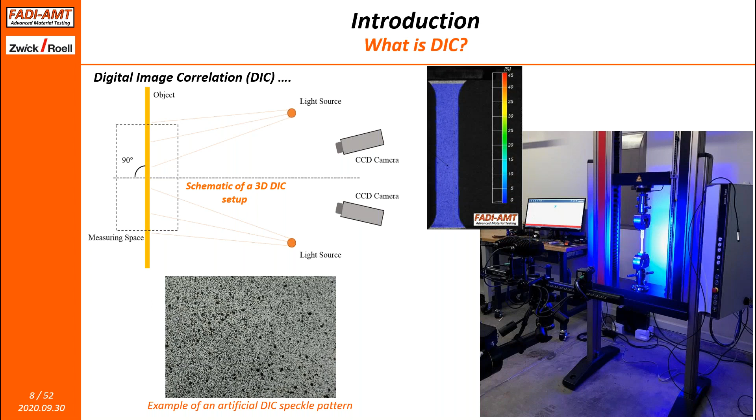That particular video you see here is a typical example of any DIC test. We see a colorful strain map overlaid over the entire sample as it's deforming. This colorful map represents the amount of strain or the intensity of strain, just like a typical finite element simulation, up until the moment of fracture.

Now that we've defined DIC, where do we see it, and what is its importance? What is the critical need for DIC? In essence, we see DIC in many tests, but the vast majority of it is still the simple and humble tension test, just like the test you see on the screen right now.

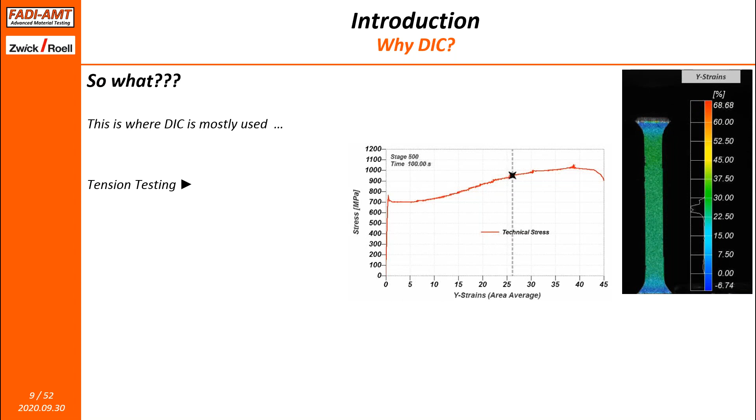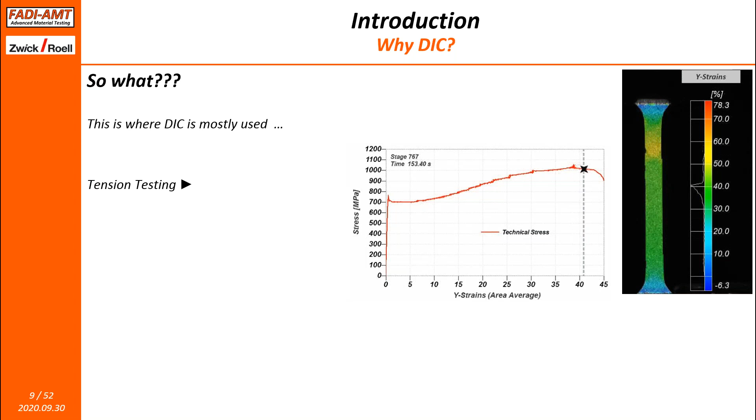In tension testing, when we use DIC, we get one of those videos I showed earlier, and we can construct a stress strain curve that looks like the one building up right now on the screen, and ultimately we characterize the deformation of the material.

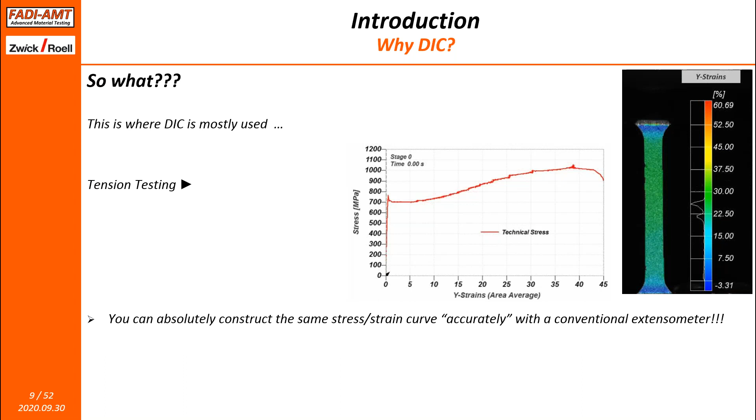The critical point here is that we can construct the same stress strain curve without DIC. You can do the same thing with the same level of accuracy with a conventional extensometer. We have to remind everyone that digital image correlation is nothing but a strain or deformation measurement technique. That means your stresses, which come from forces, have nothing to do with DIC. On a stress strain curve, the vertical axis is generated by a load cell, and the x-axis is generated by an extensometer, or in this case, DIC. So DIC only affects the x-axis of your measurement, not the vertical axis.

So in a case like this, if we can generate the same exact thing with an extensometer, why do we need DIC in the first place?

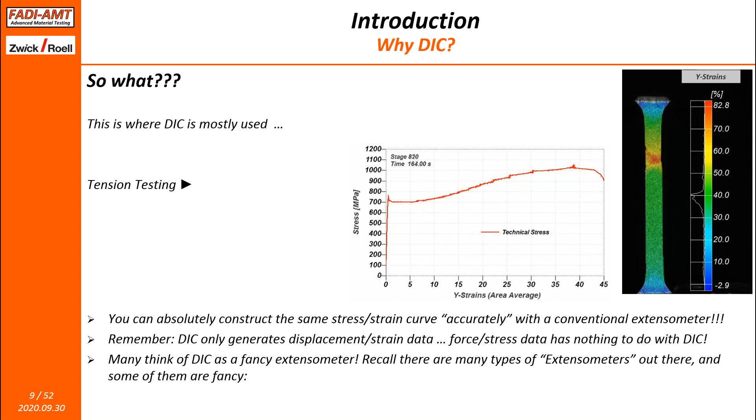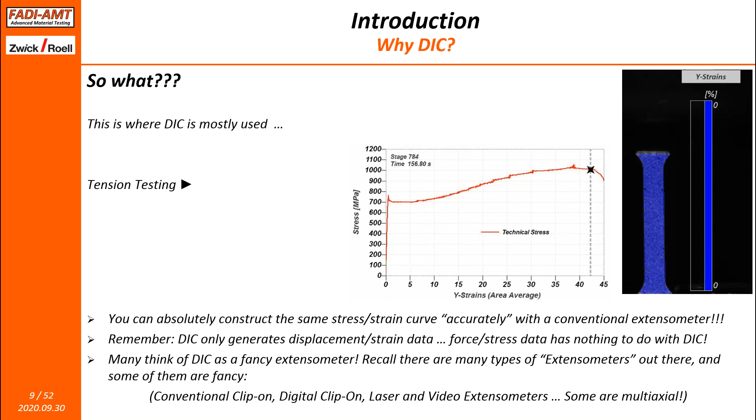Before I explain why, sometimes people think of DIC as just a fancy extensometer—the latest technology in strain measurement—and that it's good to have just because it's the latest. That's technically not correct, because there are multiple types of extensometers that work in different fashions with different technologies. Some are mechanical clip-on extensometers, some are more advanced digital, and we still have laser and video extensometers, with the latest generations labeled as optical extensometers. So we have a wide variety of contact and non-contact extensometers, some multi-axial offering multiple capabilities. That's where we need to be careful about how we compare DIC to these extensometers.

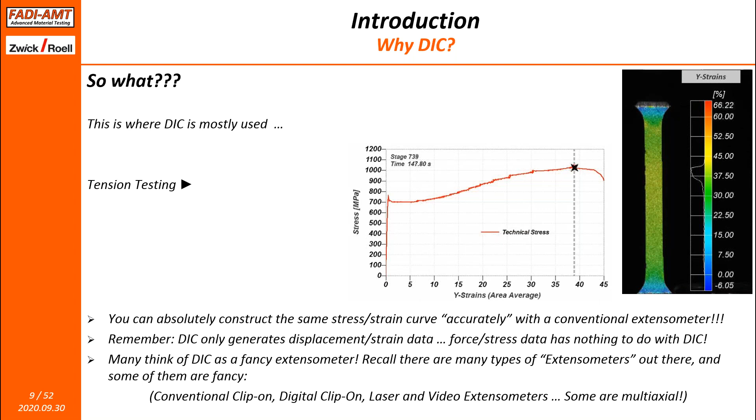When is DIC better, and when is it just as good as those? When do you have to consider DIC, and when are the cases where you can technically achieve the same objective without it? That's what we are going to try to cover today.

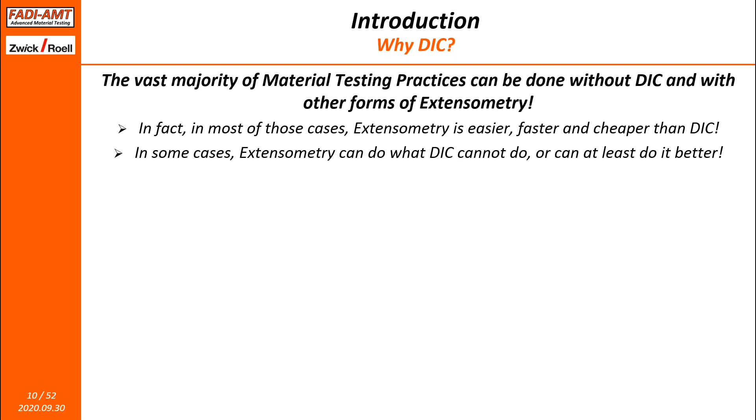We will start with a simple fact: the majority of material testing practices that happen every day in all these labs, whether academic or industrial, can be done without DIC, period, using other forms of extensometry. In many cases, extensometry is easier, faster, and cheaper, and can do what DIC cannot do. That means DIC is sometimes not the best solution, and some extensometers can do a better job.

So what is this webinar about then? We are still going to give all aspects, positive or negative, of both technologies, but today we will focus on particular application cases where you certainly need DIC, and where it provides value—in some cases very important and critical value—that cannot be matched by extensometers. We want to distinguish between them so you can make the right choice of technology for your application.

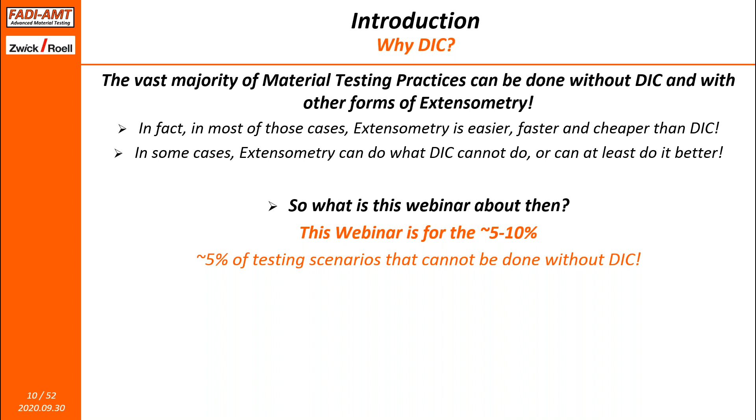For this webinar, I say we have about 5 to 10% of testing cases where DIC has a position. I break it like this: about 5% of testing scenarios simply cannot be done without DIC, and hopefully today we'll show examples of cases where it's really difficult, if not impossible, to get the same type of data without using DIC.

The other 5% can be done by both technologies, digital image correlation and other extensometers; however, using DIC still gives you an advantage. Overall, the way I picture it in my daily testing life is that we have a spectrum of testing applications, and in about 5 to 10% of cases, DIC is invaluable.

For the rest, can you use DIC? Absolutely. Can you use it for the entire spectrum? I believe not. So there is a certain position where it's really critical, and we want to focus on that—the 10% I want to cover today.

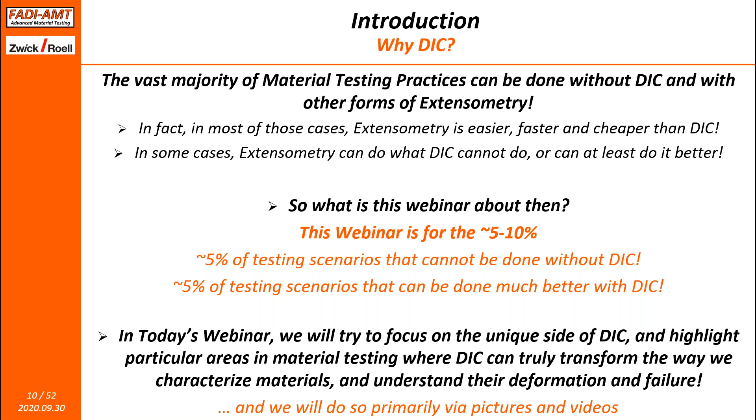Today's webinar will talk about the uniqueness of DIC and highlight the particular areas in material testing where you can use it to transform how you characterize materials and understand their deformation and failure. To do this effectively, we will minimize text and focus on examples from real-life testing scenarios that highlight the value of DIC, and also show comparisons with conventional extensometry.

To keep things in perspective, since we've done several webinars like this before and tend to spread wide across many types of tests, today we will stay focused and cover only two: tension testing and biaxial testing. The tension test is the most popular test out there, and we want to show that even for this simple, not very sophisticated test, you will find certain areas where DIC brings a lot of value.

And we think, with the diverse audience that we have today, that we can connect with most of you, because at least everyone who's done material testing has been exposed to some form of tension testing. And so there should be a nice relationship to the things you are doing in your lab right now. The biaxial testing is just slightly more complicated than the tension test. Maybe it's not as popular, but it provides another platform for comparison. So it's a step up from tension testing.

And here we show examples again of the uniqueness before we go, hopefully in future webinars, to other complex cases like shear, bending, compression, and also a dedicated webinar on component testing, where we have a totally different perspective on how we can use these technologies to help us in component testing.

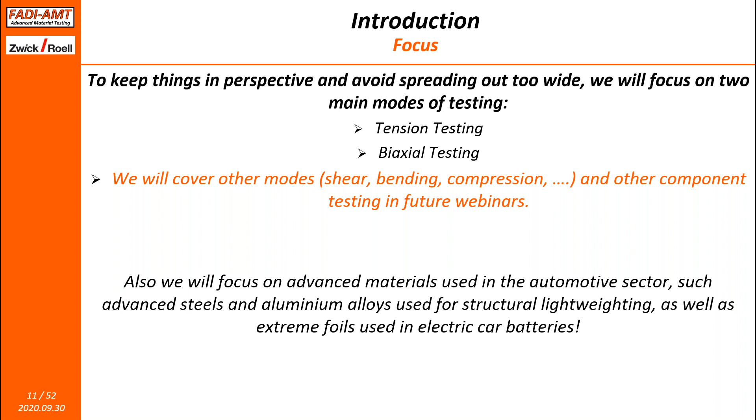And to stay true to the title of the presentation, we will focus our examples on the use of advanced materials in the automotive sector. This is an important sector, and we see a lot of use of materials that really didn't exist 5, 10, 15 years ago. So there's lots of materials that are new to the sector, or improved to the level that requires a change in the material testing system or approach. This includes advanced high-strength steels and aluminum alloys for lightweighting, as well as some foils used in car batteries. So let's start with tension testing.

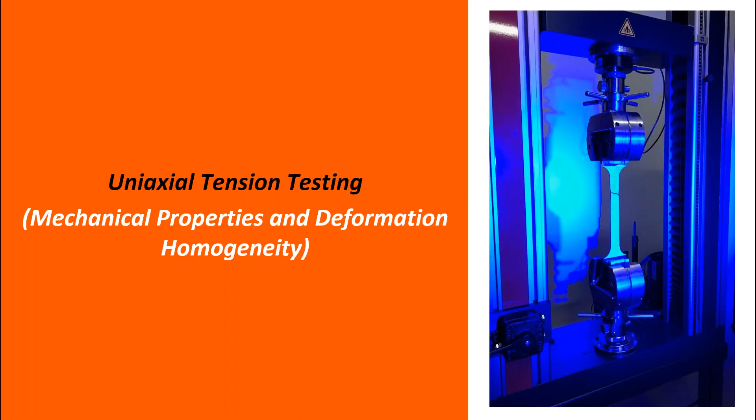Typically tension testing is done for the purpose of obtaining the mechanical properties of the material and also evaluating the deformation homogeneity of it. On the right-hand side is a typical tension setup, tension machine with a test sample up to failure. So a standard tension test per any standard, especially ISO 6892, one of the most popular, or equivalent ones from ASTM, JIS, or DIN, are the most commonly performed types of tests out there.

Naturally, in these tests, we use conventional extensometry. In fact, most of these standards are written using conventional extensometry, in particular clip-on extensometers or contact extensometers. And they are actually adequate. Of course, if they were not adequate, they would not be covered by the standard, but usually the standards describe exactly how you could use these conventional extensometry techniques to get your measurements correctly, accurately, and reliably.

In terms of the standard itself, one aspect of the standard is basically the sample geometry. And I wanted to highlight this particular aspect of the test to drive how we can go from conventional extensometry to special extensometry and, of course, DIC - and that is the sample geometry.

So if we are to talk about typical testing, we should always adhere to the standard sample size dictated by ASTM or ISO. However, there are so many cases where we have, and sometimes must, deviate from these standards. And here, in this slide, I've listed a few cases where we have to go smaller, and a few cases where we have to go larger.

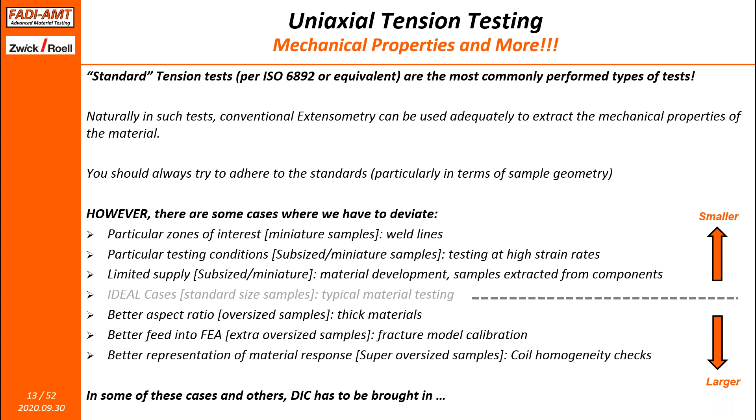We will show how in many of these cases that are listed here, and some others, DIC has to be brought in simply because of the limitations with existing extensometry.

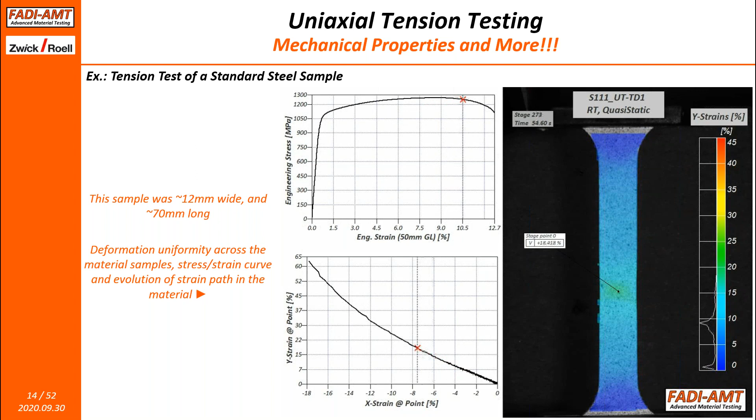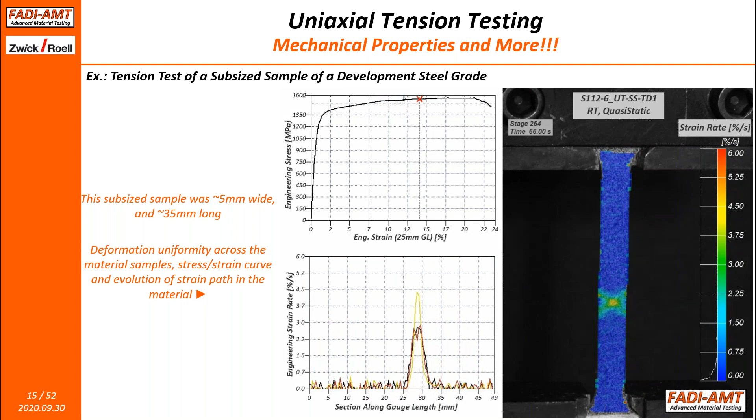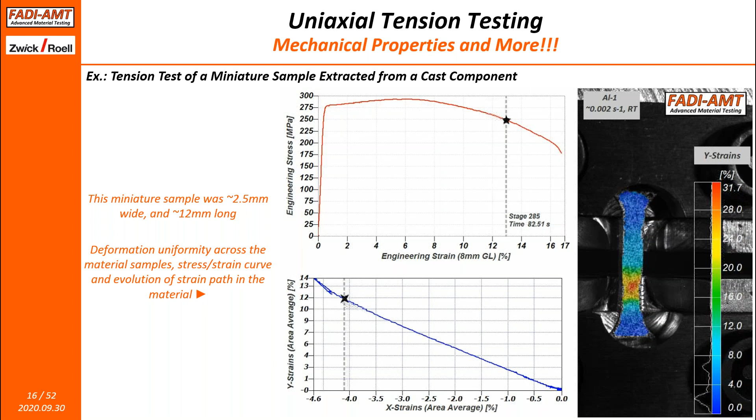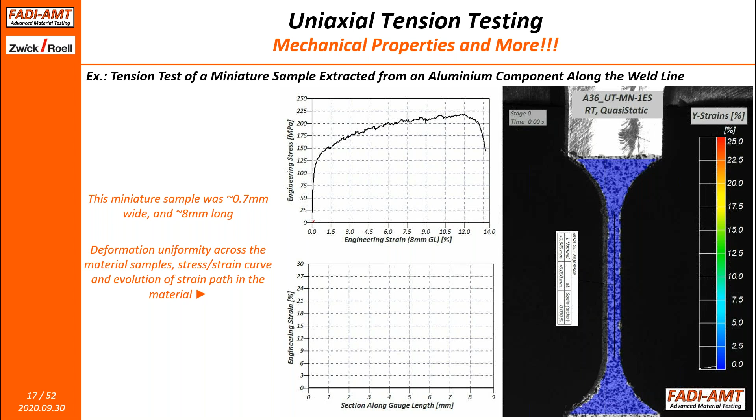Now we go to another extreme - an example of extremity in sample size where we have to go to a miniature sample. This is a weld line. A sample was extracted along the weld line of a laser welded aluminum component, about 0.7 millimeters wide and about 8 millimeters long. Could you use conventional or non-contact extensometry here? Potentially yes, but very difficult. That's where DIC offers a significant advantage in identifying the true behavior of the weld material and how it deforms. Just a note - this stress strain curve is coarse not because of a load measurement issue, it's simply because the material is a 5000 series aluminum, which will band under tensile loading.

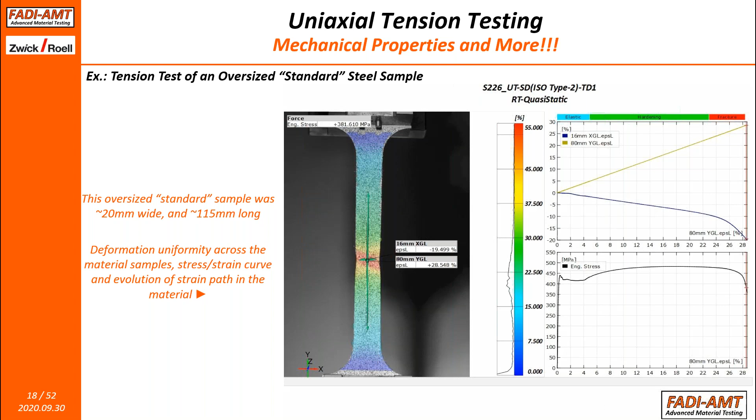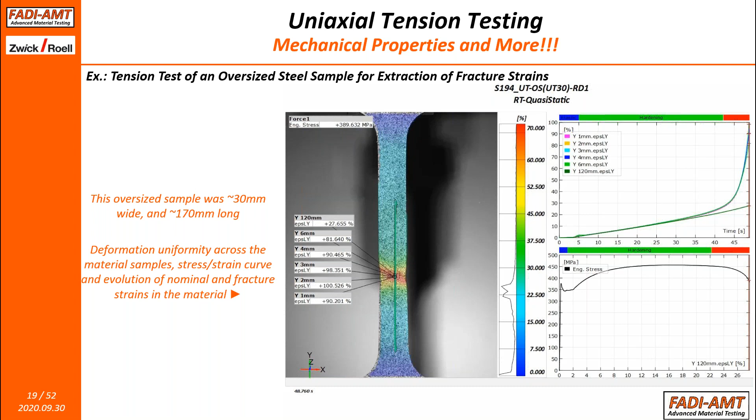And in some cases, you have to go even wider and longer because many cases require larger mesh sizes for finite element analysis.

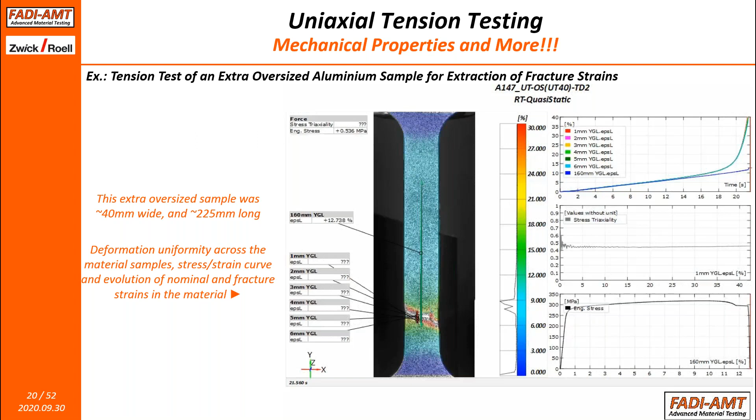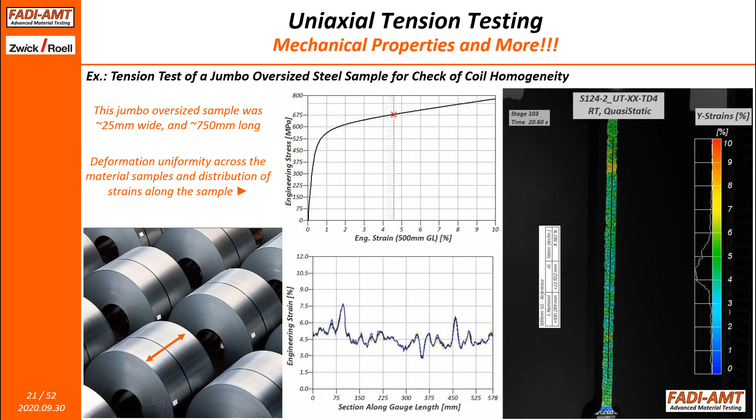So up to here, we've talked about seemingly standard or conventional tension tests, and we've highlighted many cases where typical extensometry cannot be used. Now we go to another set of tension tests, but they're technically more complex in nature, that will also invite applications for the DIC to complement or replace conventional extensometry.

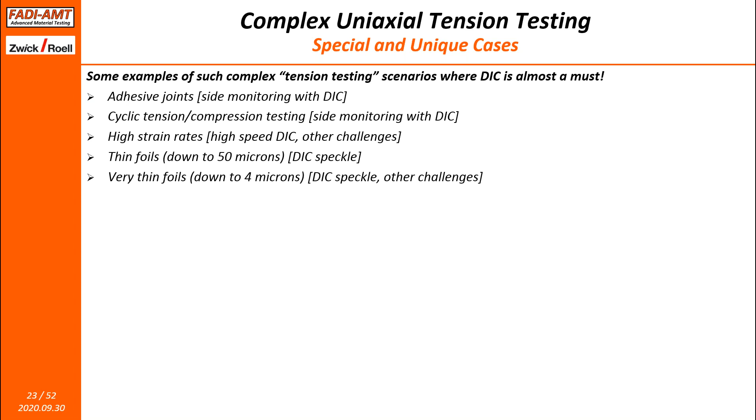And so I have picked here a couple of cases. Adhesive joints, or testing of adhesive joints. This is a standard test in essence, but we will show how the DIC can improve it. Cyclic tension compression testing - this is a very custom test for spring back prediction, and we show how the need for side monitoring with the DIC brings significant value. Then we will just provide a very quick snapshot of high rate testing, or testing at very high strain rates. Again, this is a very special area where the nature of the test, the high speed and other challenges makes it really difficult to do this kind of testing without the DIC. And finally, I'm going to just touch on a couple of examples of foil testing, foils that are thin or extremely thin, and how DIC can allow you to obtain the strains in a correct manner so that you can construct a meaningful stress strain curve.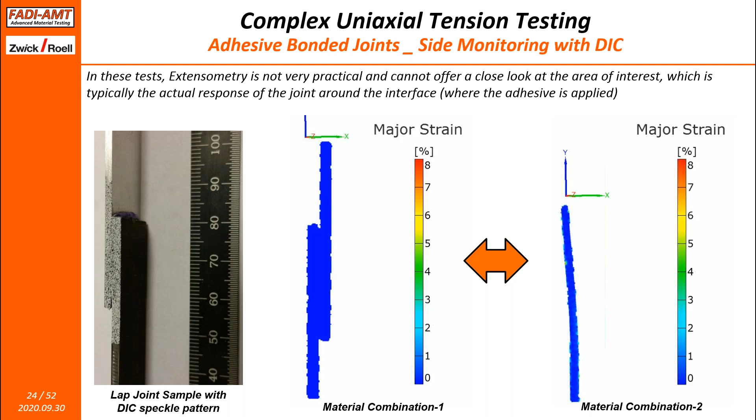And therefore you see totally different failure. Again, on the right-hand side, there is a peeling effect that starts from the top to the bottom. On the left, it's a sudden failure of the actual adhesive layer. And again, that's something that is impossible to do with conventional extensometry.

Another case of complex testing still within the tension domain. This is a tension compression cyclic test specifically designed for spring back prediction in the automotive sector. It uses a tension machine just like any other, but we have to couple it with a special fixture to prevent the material from buckling, which we call an anti-buckling device.

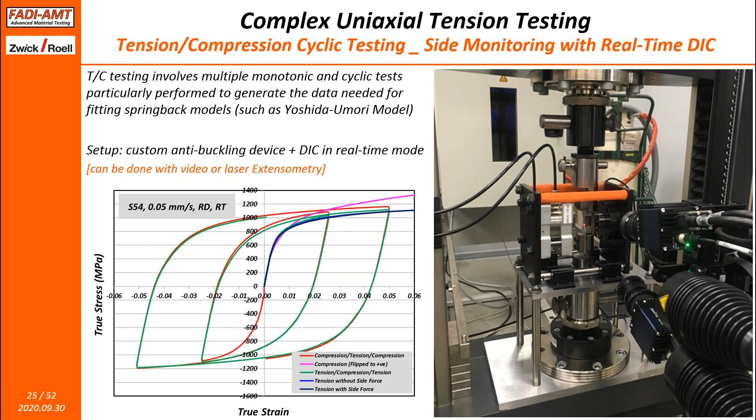Those strains are extremely important to measure, and not just measure them, we need to measure them in situ during the test so that we can design and execute the tension and compression cycles you see on the left. We should be able to monitor the strains during the test and reverse the machine when we hit a particular value. That's basically what can be done with DIC, and again, it's difficult, if not semi-impossible, with conventional extensometry.

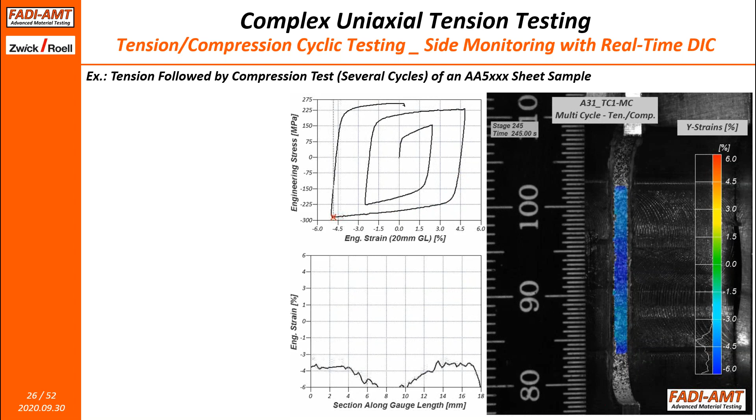The critical area of high strain rate testing, or testing at high speeds and high strain rates. It's a simple fact: if you want to simulate events like crash or impact, then you need data. That data is simply tension testing data at different speeds. The typical scenario is that we have so many issues associated with this type of test.

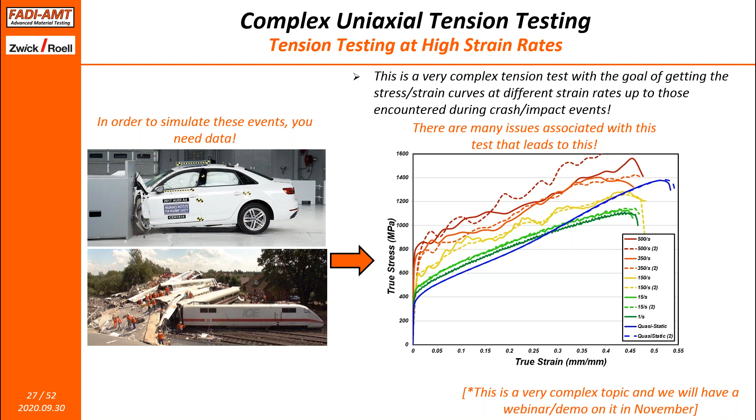This is a very critical area where DIC brings a lot of value. Now, this is again a very complex area, and we have another webinar/demo in November about this particular topic. But for today, I just selected a couple of slides to highlight the issues and how DIC can be used here, or why it's used versus conventional extensometry to produce better data.

With DIC, we can resolve some of the issues encountered in high-speed testing. One is that when you go faster, you have a shorter amount of time to measure or collect data. When talking about 100 to 1,000 strains per second, you have about 1 millisecond, sometimes less, sometimes more, at those speeds. Even though we have data acquisition systems that can capture load data at that rate, there isn't an easy way to capture displacement or strain at that kind of rate or frequency. And of course, the second problem is you can't use any form of contact extensometry here.

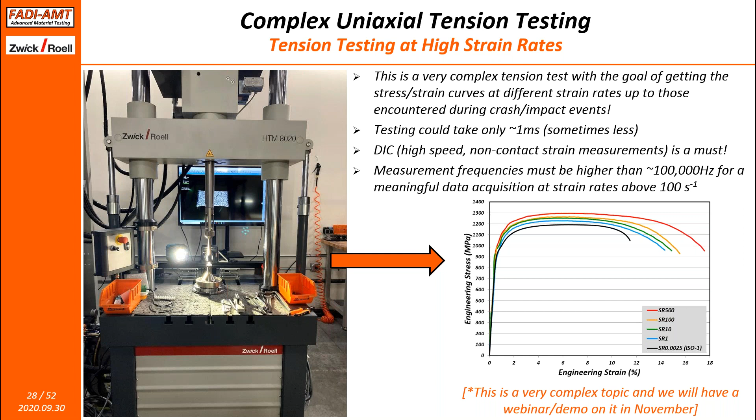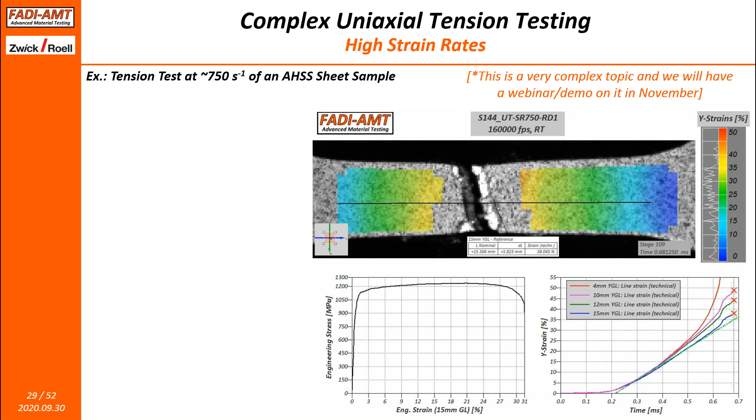Just using high-speed imagery and then using the same principles of correlation, we can obtain strain data, and we couple the strain data with the force data or stress data. Now we have a stress-strain curve, as the one you see here on the screen, for about 750 strains per second.

Final case for tension is foils. This is a new area. I mean, it's not actually a new testing area, but there's new emphasis on it because we see a lot of foils around us, and there are many materials being investigated for different applications, so now we have to deal with foils.

In principle, there's nothing really different between testing a foil and a sheet. It's the same machine, the same grips to some extent, and so on. The only difference is that the sample is really tiny or thin, and in some cases extremely thin.

Regardless, once we enter the foil domain, when you drop below 500 microns, like half a millimeter, it's really difficult to use any clip-on extensometer because you'll damage the sample before you start the test. So that's out. You have two options: use DIC or any other non-contact extensometer technology, like laser or video.

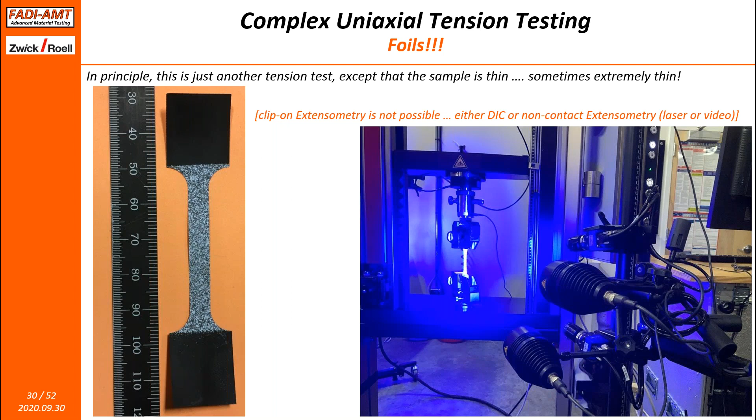So that sounds okay. In many cases, yes, video or laser extensometers can work. I'm going to give you a couple of examples where either technology would work.

If you have thin foils but the strength of the foil is very strong, then it's technically not a significant problem. You can use laser extensometers and video extensometers. So long as you can provide those marks on the sample for the system to track, you should be absolutely fine. It's not necessarily a big problem with thin foils if the strength is high, because your likelihood of damaging the sample is lower.

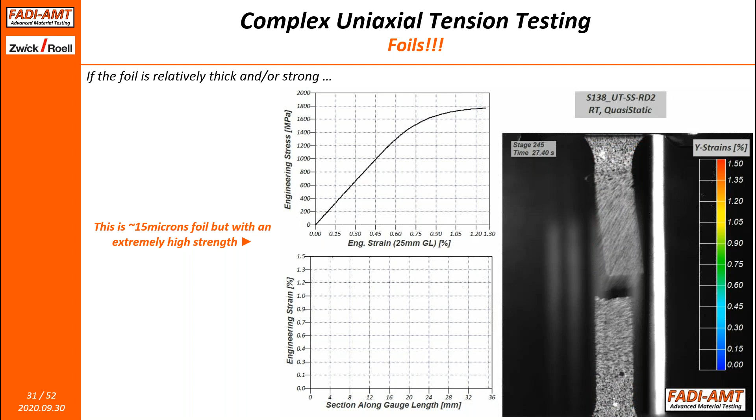The same thing applies if your foil is generous in terms of thickness. We always say internally, if it's above 50 microns, it's tolerable. You can put a couple of marks, use laser extensometer markers, or paint it for DIC. But in both cases, you must be very careful because you could potentially affect the sample you're trying to test, and if things aren't done properly, it will lead to premature failure in the sample.

And again, I want to show this video, and that's what we typically look for. Regardless of the strength and thickness of the material, we look for nice deformation without any significant hot spots, and ultimately, ideally, we would want to see failure in the middle of the sample.

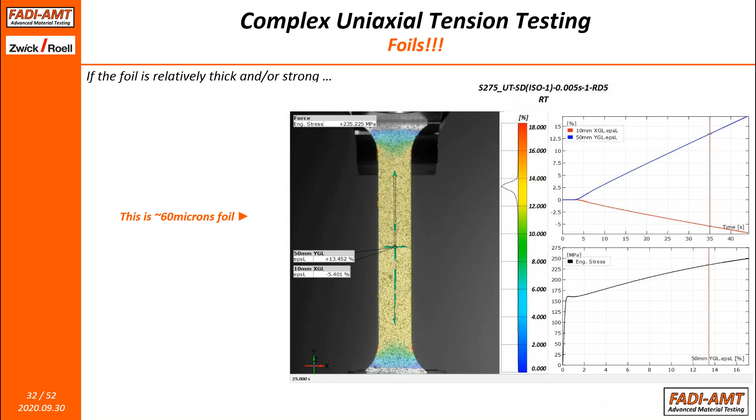In these particular two cases, this is where conventional laser/video extensometry could offer an advantage over DIC. If you can track the material deformation without having to paint it, that is actually better than using DIC, because DIC adds a layer of paint or two, which could affect the properties of the material and also the sample itself when you handle it.

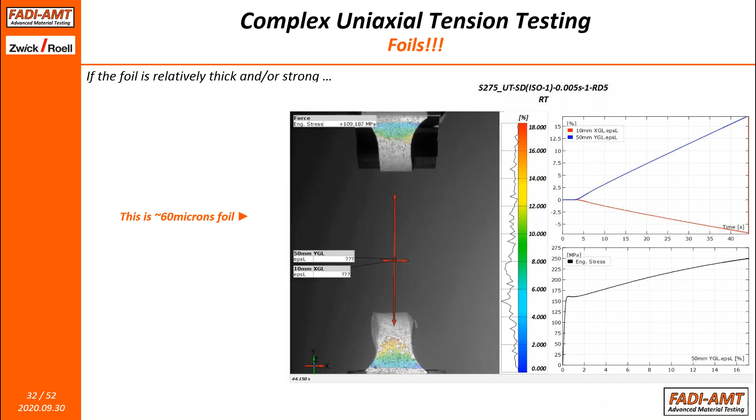But then we go to some extreme cases. When we go to high speeds, if you're doing high speed with foils, we're back to the same scenario as sheet metals before: it's really difficult to use conventional extensometry, so DIC has to be used in the same fashion, at intermediate or high speed mode, just like we've done before. This is just an example of it.

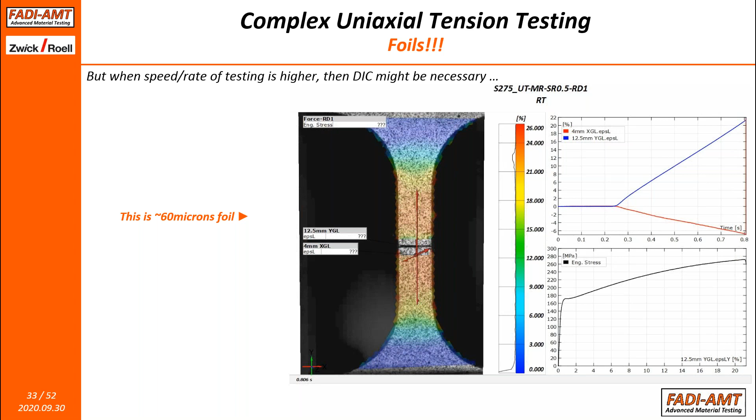Then we go to the extreme of the extreme. When the thickness of the foil drops below 10 microns, it's really, really difficult to use anything, because now the problem is not really the type of technology. The difficulty is how you could use any type of extensometer, whether video, laser, or DIC, without damaging the sample while marking it.

So here we say all technologies are comparable; it only depends on your preparation of the sample. This is a 4 micron sample. Ultimately, it was done with DIC here to show that it can be done, and it can be done reliably. You can see it's a nice stress-strain curve, about 6 to 7% for this material.

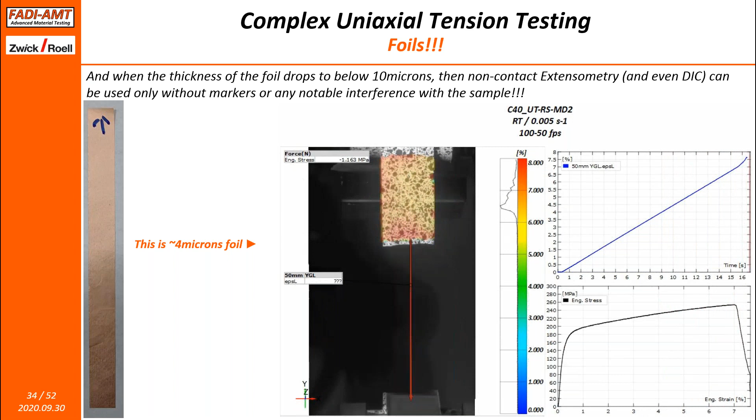Very nice strains, but it's not straightforward to do it with any of these techniques, because the main issue is how to make sure that you don't affect the material itself during deformation.

Okay, so that was the collection of examples that I have for tension testing. Now I'm just going to go over a couple of examples for the more complex mode of biaxial tension, just to spice it up a little bit and show that there are some cases where we could consider DIC versus conventional extensometry.

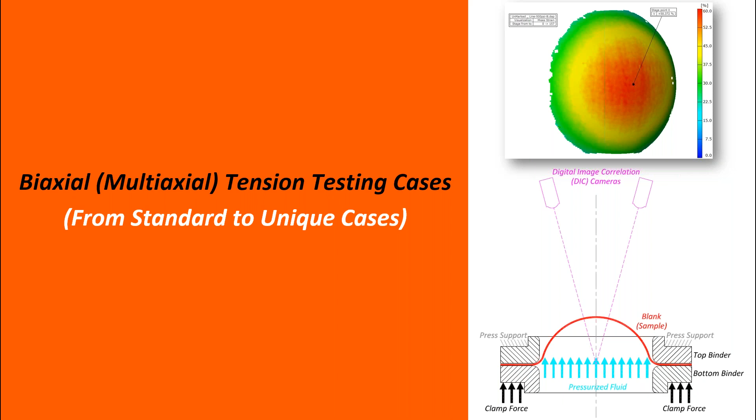With biaxial testing, we have several types of biaxial tests. This could be a mechanical stretching test, known in the automotive sector as Nakajima or Marciniak. It could be a hydraulic or pneumatic bulge test, which is basically a friction-free test. And there's a third type, more complicated, which we will not cover today, called the cruciform biaxial testing.

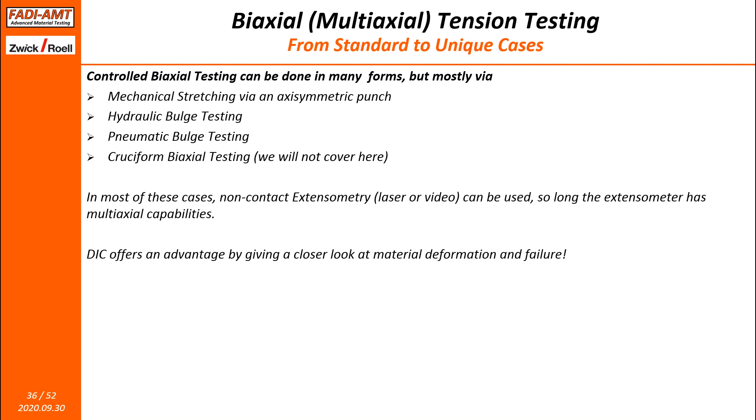But at least in the first couple of types of biaxial testing, you could use non-contact extensometry, laser, video - no problem with that. It just depends on the objective of the test. In some cases those are adequate, in some cases they are not. And that's where you have to use DIC, because it offers advantages related to material deformation and failure.

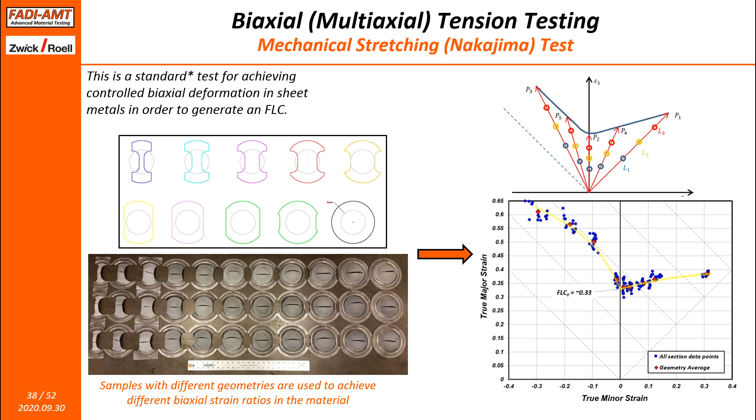To give you more detail about how it's done, with that particular setup, you change the sample geometry as shown here to achieve different deformation modes or biaxial ratios, as shown in the schematic on the top right corner. With control of the sample, you can achieve tension, plane strain, and balanced biaxial. That depends on the sample, and ultimately you can generate an FLC as shown at the bottom right corner.

But how can this test be done with and without DIC? In essence, you can do these tests without DIC. In fact, they can be done without any extensometry per the standard. The ISO standard dictates that you can do it in a post-deformation mode.

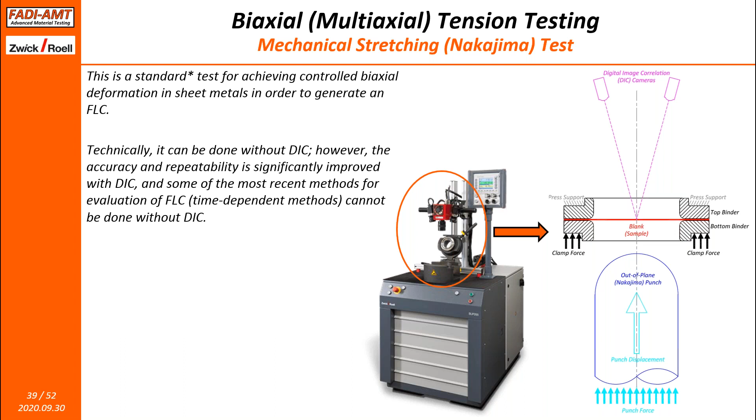However, it's not actually very accurate. So the use of extensometry, non-contact extensometers and/or DIC will help improve the accuracy and repeatability of these tests. In very particular cases, only DIC can be used to provide certain types of outcome, and I will explain a couple of them, including basically the FLC generation with the new methods.

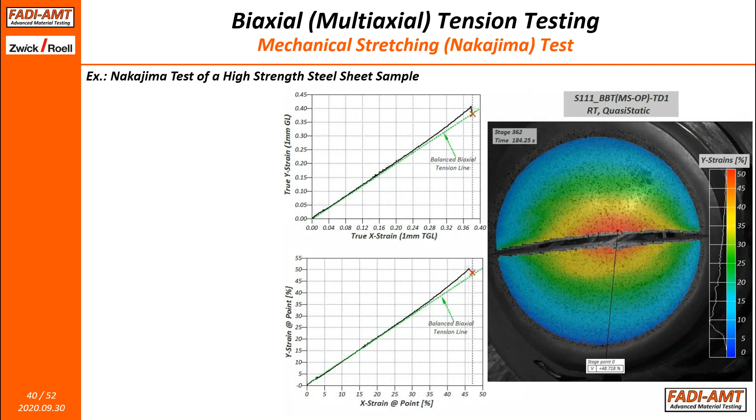So here's an example of a video done with DIC with a typical Nakajima test. Again, the nice thing about it with the use of DIC is that you can monitor the deformation of the sample. You can measure the axial ratio between the X and Y, and so you can determine whether it's balanced biaxial or not. In this case, it's almost perfect. And also you can see exactly where the sample fractures, so you can study closely the fracture of the material, if it's favorable or not.

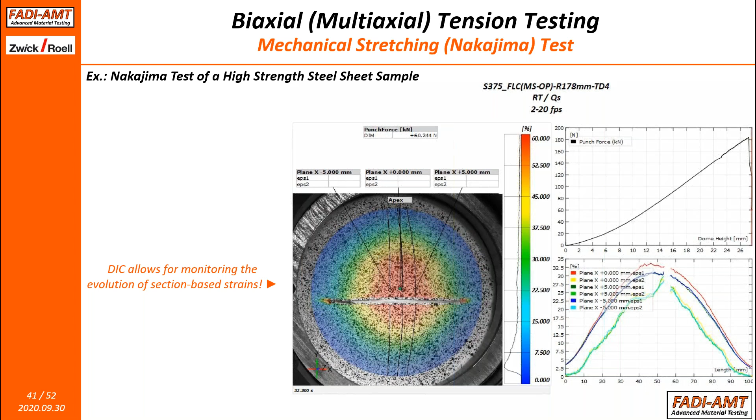There's a second method in the ISO now, which is the time-dependent approach. The time-dependent approaches, there are multiple of them, rely completely on the use of strain measurements that tag the amount of strain to time. Without DIC, you really cannot track and measure those effective strain accumulations up to the point of failure, and that's where it's uniquely used to support this kind of testing. One last example, a couple of examples about the use of DIC with this kind of testing.

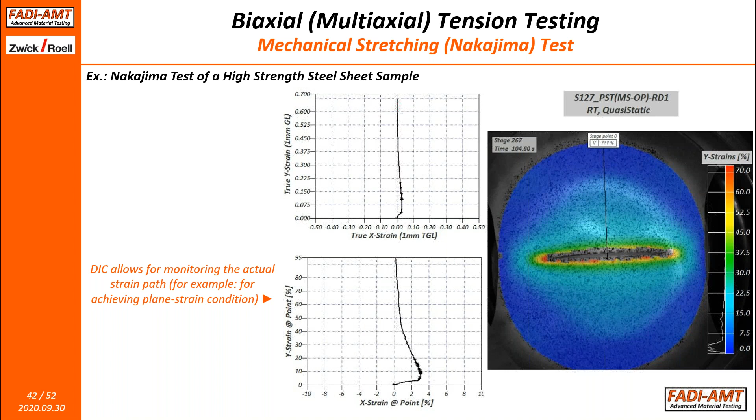If you are not interested in FLCs and you just want to achieve particular loading cases, in this video we show how you can achieve a true plane strain condition in a sample with the use of DIC, because you can monitor and measure everything accurately.

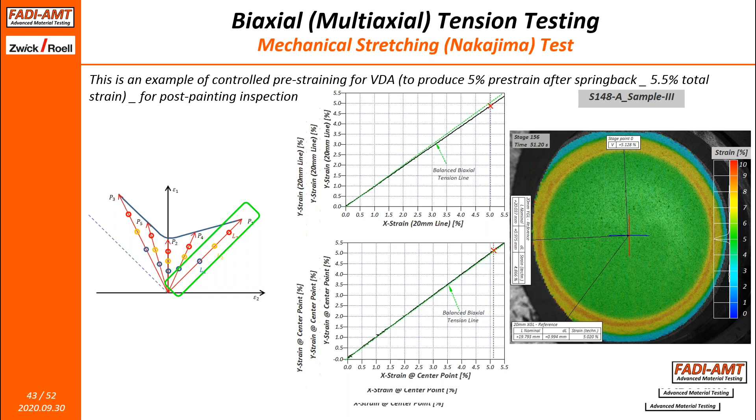Last example we have for today is about another type of biaxial testing, which is friction-free testing, and that can be done with bulge testing. Whether you use a liquid or gas, in essence it's the same technique, just we call it hydraulic bulge testing. The schematic for it is shown here. You use the same kind of machine as before, like a BUP machine or a metal forming machine, and you just replace the tooling from mechanical tooling to hydraulic bulging.

With DIC on top of it, we can monitor the evolution of the shape of the sample as the test progresses. Just like before, you can do this test with DIC or without DIC. You can use optical, laser, or video extensometers, but in this case they have to be multi-axial. You have to have the ability to measure epsilon X and epsilon Y, which does exist and can be done.

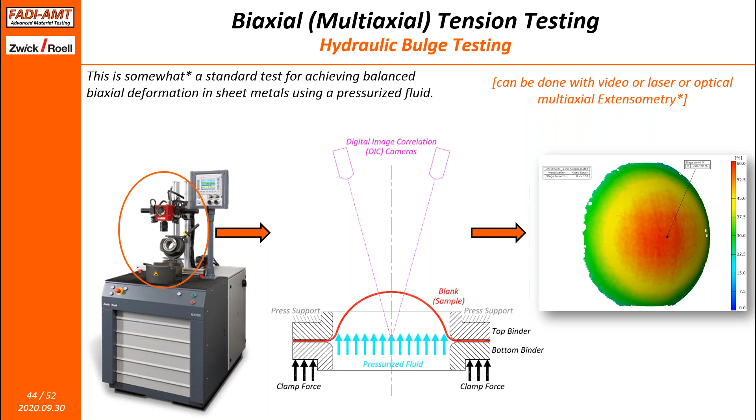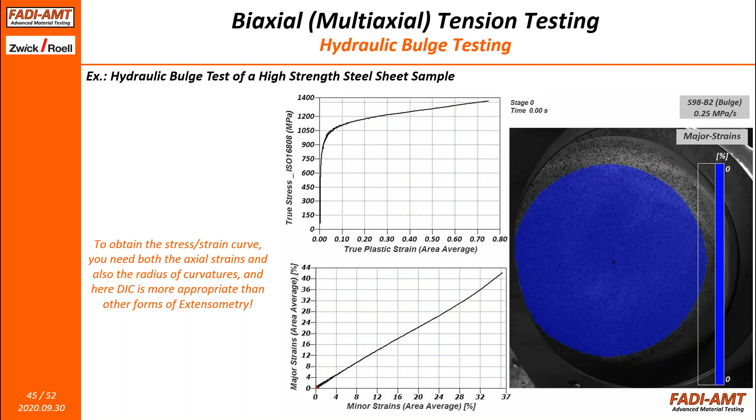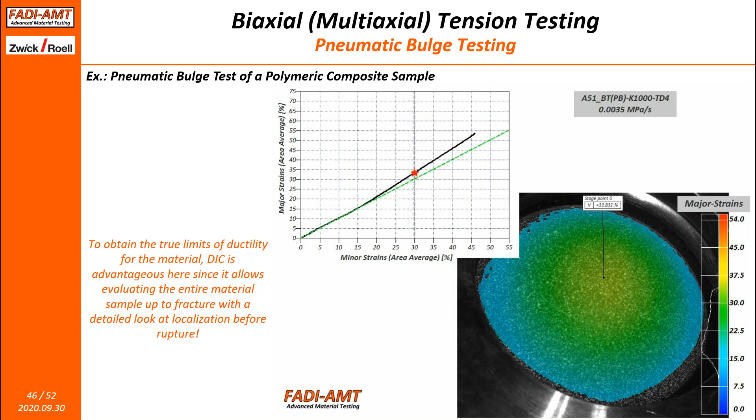Similar test in principle, this is just for a polymeric material, shown here in a pneumatic mode instead of hydraulic, or instead of liquid we're just using gas. As I said earlier, it's technically the same exact principle in terms of the testing approach, we just basically use gas to deform the material. Again, in terms of principle you can use video or laser extensometry, but if you want to calculate stresses and strains, then you must use DIC in order to capture the curvature of the sample.

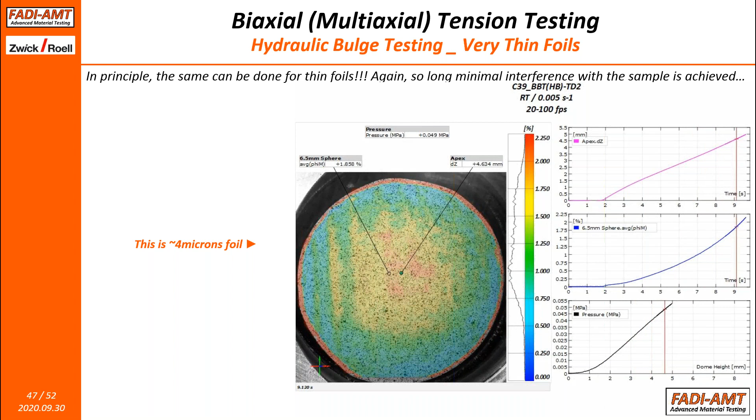One last example here is, what if you have to do bulge testing of thin foils like the ones we showed earlier? This is a perfect example of how it can be done. Again, this is maybe an extreme of the bulge tests, this was done on a 4-micron foil, and we repeat the same exact rule: you can do it with any extensometer, so long as whatever technique you use minimizes the interference and the influence on the sample itself.

You mustn't forget that DIC always requires painting. So imagine a 4-micron foil, when you apply a layer of paint, you're technically interfering with the material, so this has to be checked. If it can be done with other extensometers without applying anything to the sample to preserve it, that's fantastic. If not—in this particular case, this is a copper foil, very shiny, very smooth, very nice, with no contrasts—so applying adhesive tapes, basically markers, for a laser extensometer to follow is really difficult, if not impossible.

So you would want to look for either video extensometers or these advanced extensometers that require no markers, or use DIC as we've done here, but you have to be super careful about how you paint the sample in order to obtain your stress strain curve.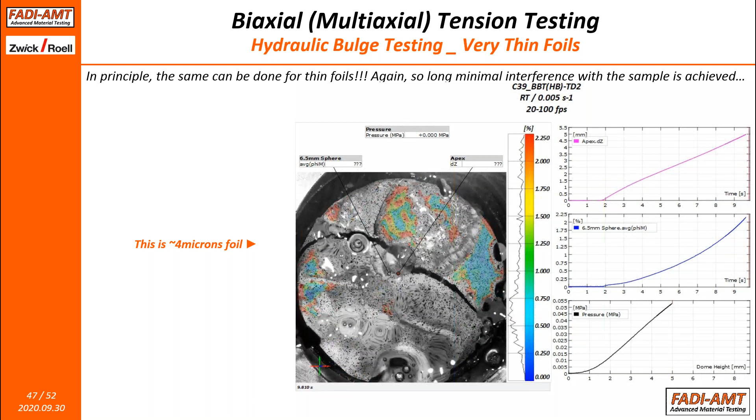So this was my last technical slide, and we wanted to conclude with the general note that DIC is a very, very powerful tool, no question about it. Is it the tool to go to all the time? No, not necessarily. We try to highlight in this webinar that there are so many special cases where DIC is very powerful and or the only option to get the right results in terms of strain measurements. But in my estimate, that's just my personal estimate, this is not more than 5 to 10% of the total number of cases you actually encounter in material testing.

The vast majority of users out there are performing standard tests, whether it's tension or related. And for those cases, it might be just easier not to mess with DIC and just use conventional extensometry. In those cases that you can use either one, typically DIC is more time demanding or consuming, and it requires a particular skill. So that's why we always encourage people to clearly study the case, because sometimes there's no need for it, and sometimes you're just adding complication to your testing. But in those particular cases where you need it and can benefit from it, DIC is a fantastic and powerful tool.

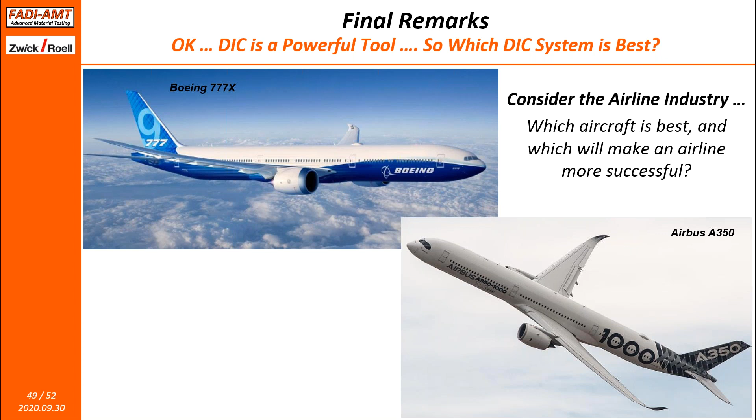And so the question is this, you should ask yourself this question: when you fly out there, do you really pay attention to what kind of airplane you're riding or taking? And does this really make the airline that uses either one of the airplanes better or worse, more efficient or less efficient? The true answer is that by all means, both airplanes are comparable, indistinguishable. And like I said, 80 to 90% of people when they fly, they don't even know the difference between this airplane or that airplane, and actually there isn't really much of a difference. It doesn't really affect the operation, it doesn't affect the flight, it doesn't affect even the airliner in terms of whether it's this aircraft or that aircraft.

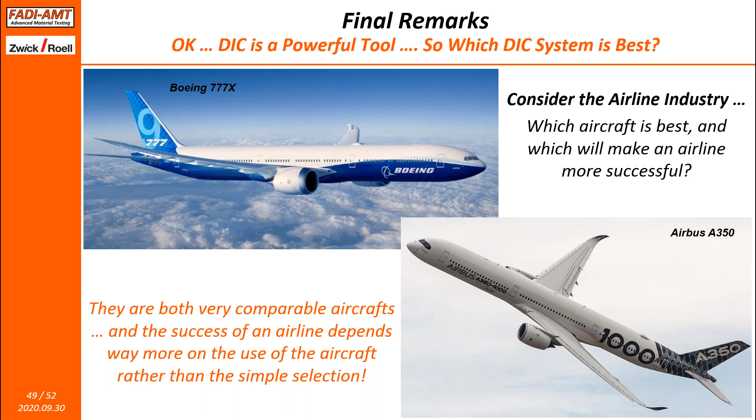They are indistinguishable. However, the success of the airline depends entirely not on the type of airplane, but rather on the use. How do they put these airplanes to use? And that's what makes your experience maybe more positive than other experiences with airliners. And that could be carried over exactly the same way to DIC systems. There are two major DIC systems out there. Which one is better? They are indistinguishable.

Because DIC doesn't really depend on the actual system. If you look at the two systems and any other systems out there, they look exactly the same because technically they're just a couple of cameras and a couple of lenses, nothing more, and a software. So in essence, these components are exactly the same. You could potentially use the same camera and the same lens and the same lighting in either case. So specifying the right DIC system obviously is important, just like specifying the right aircraft for your use as an airliner. You don't want to buy a very large airplane for an application or route that requires a small airliner. The same thing here: when you pick your DIC, it's very important that you pick the right cameras, the right lenses. And in our opinion, beyond that, there's not really much to it, because lighting is very, very similar.

Only special cases require special lighting. As for DIC software out there, even your own algorithm developed in MATLAB will get you the same result. So after you spec your DIC system, what's more important to remember is how you put this DIC to use.

Developing the right skills for using DIC is really what's going to get you the outcome. This is why we always advise: before you get a DIC, ask people who use DIC. Ask your colleagues, a bunch of people in academia use DIC today. Ask them about their particular cases of use, because sometimes we hear the general label that DIC is fantastic and can be used for everything. And truly, that's not correct. Sometimes it is powerful and can be used in many cases, but sometimes it's an overkill.

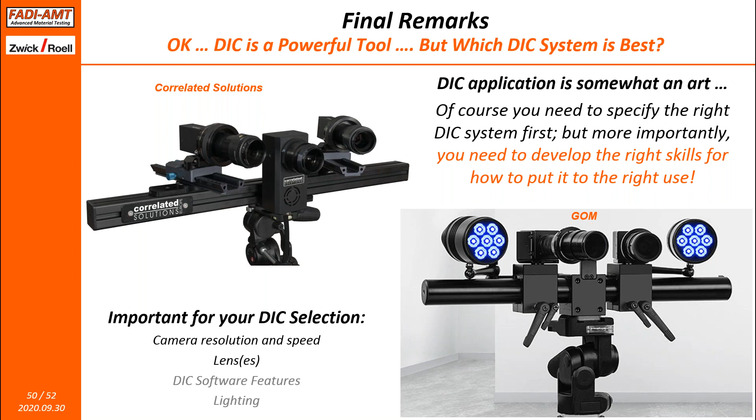So this was my last slide. I wanted to thank you all for your attention today. I hope this was useful to you, whether you use DIC or not, or you're thinking about it.